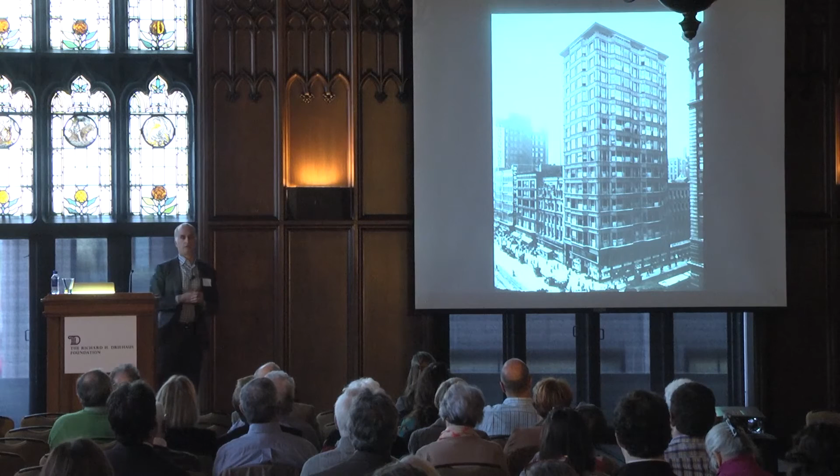So with items like this certainly being published and seen by architects all across Europe, but certainly in Germany, someone like Mies would certainly be aware of this, and in fact, inspired by it.

So in 1921, there was a competition for a high-rise in Berlin on Friedrichstrasse. This was the submission that Mies had made. And certainly as a student at IIT, spending five years in Crown Hall, you were aware of this—it was one of the few history lessons you learned at IIT. But this sort of glimmering tower had a new sense of what a tower could be and what the materials could be.

It is both reflective and transparent. It showed, in some ways, almost the dematerialization of a building into light, air, refraction, and reflection. It was really a very interesting image of what the future would hold.

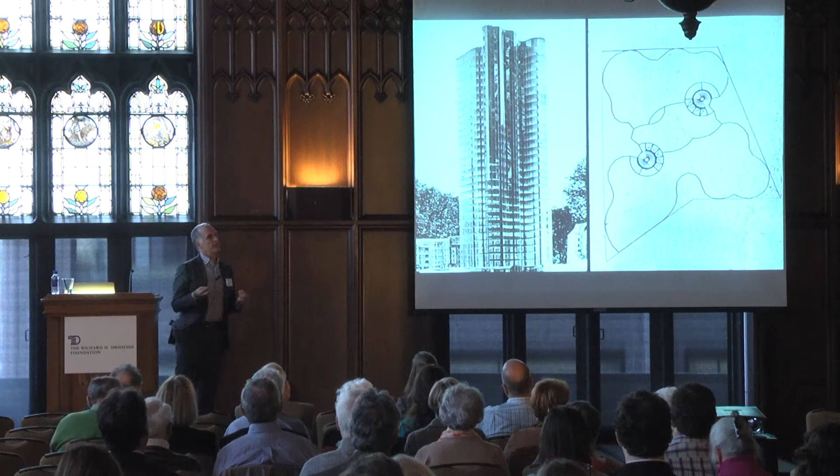The plan, maybe borrowed from Burnham with the Flatiron, shows a particular organizational sense. At the same time, Mies produced another image that we've seen again today, which is much more organic and free-form. But ultimately, what both of these images start to show is almost a complete lack of structure.

Moving forward to the end of the 1920s, we've seen it before, the Barcelona Pavilion, which again is an amazing building that appears on some level very simple and understandable when you stand in front of it and beside it, but as you go into it, it becomes more complex.

You can see the plan here. It's a series of travertine plaza with pools sort of at either end, and what appear to be some form of bearing walls sort of enclosing the whole space, although the center of the space is very free with floating walls. Again, I'm not an architectural historian, but what I find interesting is if I look at the center area...

That roof is indicated here in the blue, and if I take what could be bearing walls, I could support that roof very easily. So here in green, I've got what might have been the initial bearing walls, but then overlapping that is a series of 8 columns. So there's a bit of ambiguity that I think architectural historians have talked about a lot.

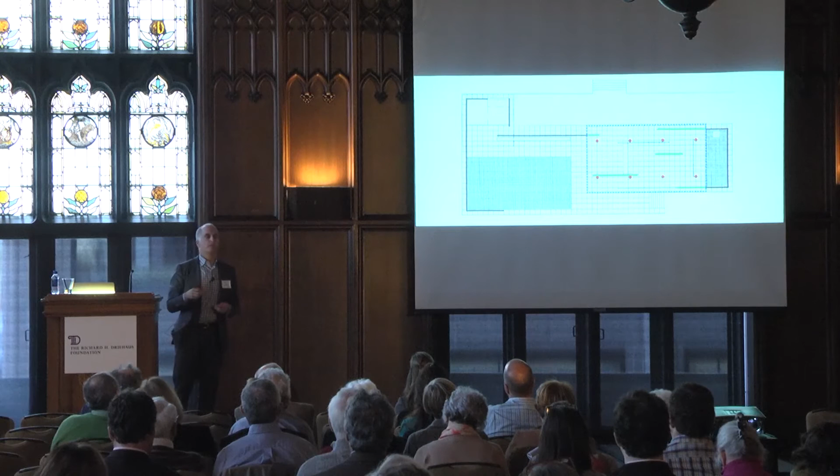What is the structural system here? Both are happening. And again, what I remind the audience is when you look forward to, let's say, the IBM building or certainly Crown Hall with the incredibly deterministic structure, here there's incredible ambiguity.

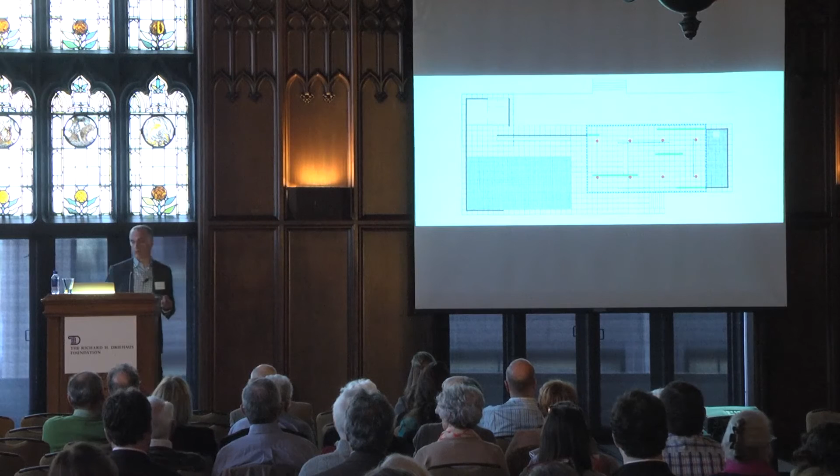I think that's what is lost in a lot of discussions about Mies and his adherence to structure. You can see that overlap of both wall and column. Is it free space, or is it space that is open because of the columns? It turns out, for the most part, the columns were the supporting structure.

If I jump forward very quickly to IIT, he's brought in as the dean, and his first building, which is the Mineral and Metals Research Building in 1942. You can see he goes from those free floating planes, both roof and wall, and it becomes a box. And we've heard before about the structural expression of that box.

This is not unique to Mies. This is actually unique to perhaps Chicago with warehouses. This is a routine way of actually doing structures for warehouses that Mies probably was aware of as he drove around the city. You can see here again sort of the open bay.

Here's where he starts to become interested in what's called the poetry of assembly. He's very interested in how things actually go together and the expression of the purest forms of the material that goes into a building.

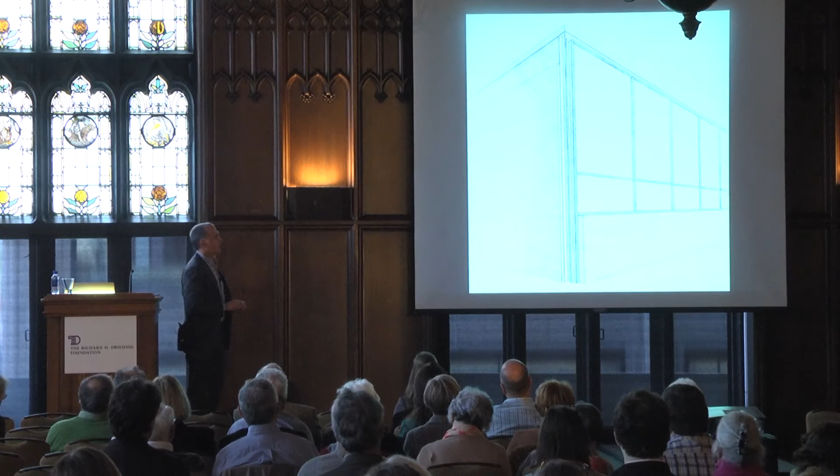An image or a study of a corner. As a student at IIT, you were certainly made aware of this condition. Here, the structure, the corner, how the structure actually turns the corner is actually a very difficult condition. Here, the steel turns and the brick is infilled. The brick is not bearing, and he expresses that non-bearing by exposing the corner of the brick, at least on this sketch. So he's trying to have clarity of construction, clarity of structure, and clarity of material.

Second building in about 1945, the Alumni Memorial building. Again, this starts to become more clear, his structural expression and infill.

And he wrote and said that the purpose for which a building is used are constantly changing, and we cannot afford to tear down the building each time. That is why we have revised Sullivan's formula, form follows function, and constructed a practical and economic space into which we will fit the function.

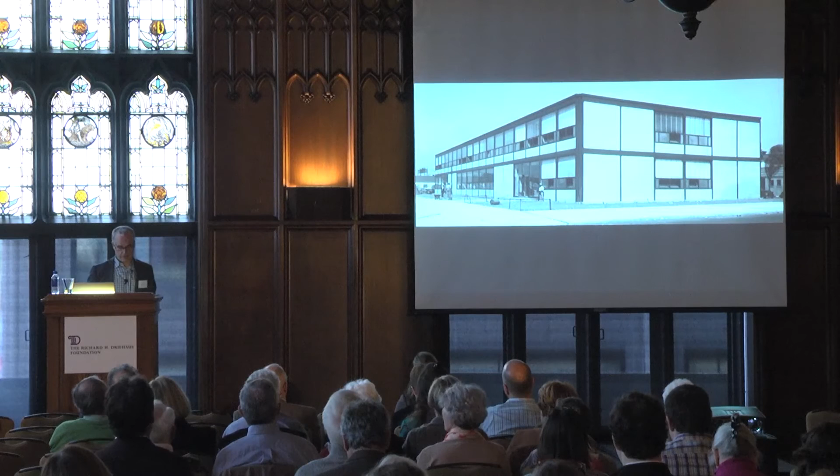This idea that Mies was trying to clarify his structural conditions certainly was a central aspect in his architecture at the time. Farnsworth House in about 1952.

There were other glass houses. This is not the first glass house in the history of the world. However, in some ways, he was stripping and minimizing even more the structure and the materials that he would use in his construction. Here, there's really four materials. There is certainly the steel structure, both for the terraces and the actual structure for the house. There's travertine on the platforms and terraces and floor.

There's plaster on the ceiling, and then there's glass as an enclosure.

He was reducing and minimizing the number of components that went into it, more and more as he proceeded. You can see here a plan - it's an open plan with a core, and it's not in the center. It's off-center, allowing the occupant to have different experiences as they trace around the perimeter of the house. There are private areas and public areas, and it's a beautiful construct of terrace and house all weaved into each other. It's white, as I've read, simply to be pure against the green and lush environment in which it was placed.

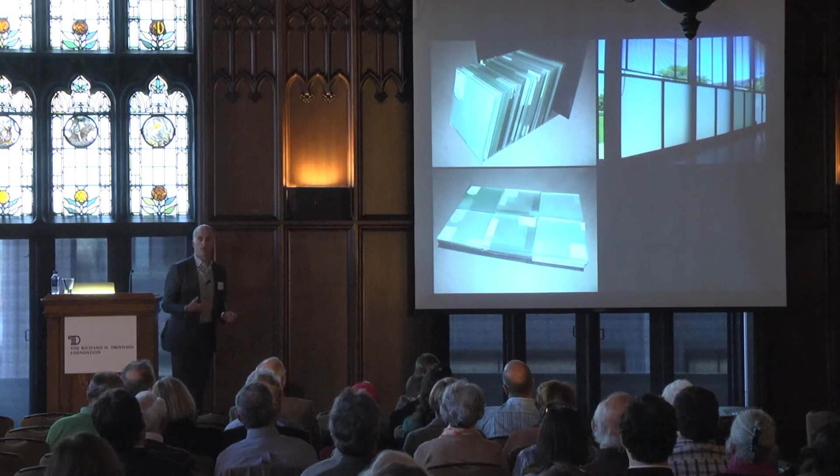So we went around campus to try to find examples, because all the glass had been taken out of Crown. We tried to find examples of how it actually was, what it looked like. We went through a fairly long and arduous process of looking at different glasses. In this case, you can see 6 samples actually brought to site and installed to understand how it would react.

The university, however, insisted that they would not live with this sort of glass ever again because they had a tremendous problem. It was basically a maintenance nightmare.

This is not a caricature of an architecture student. I actually think this is an architecture student that is unemployed and becomes a graffiti artist, because that's exactly how they use the space. They have no problem painting, gluing, and then the universal masking tape that sits on the glass for 4 months, getting baked in the sun every day, and then it tries to get removed.

So we had to prove to the university that we could do it. We got the benchmark sample, the clear glass, and we put all these things on the glass. We actually found a sort of 3-part epoxy to enable it to have resistance to all the student activities, and at the same time not change the character of it.

So we went through, you can see some of the installation here, but I want to talk specifically about one part of the building, and again, there's so little to the building other than girders, mullions, and glass. Here's a section of the building, the glass installed, those 13-foot-high pieces of glass on the top, and then the lower piece is about 8 feet by 5 feet. I want to focus on exactly the center part, which is about 8 feet high on the inside of the building. It's where the glass stops and the mullion of the two pieces come together.

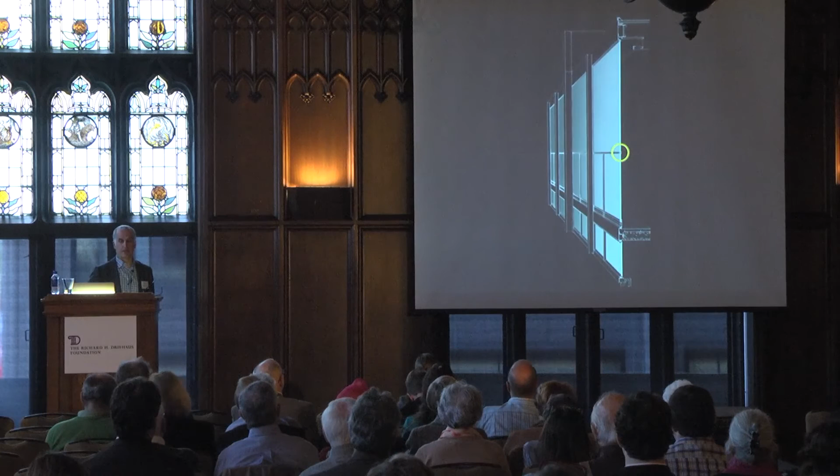If we look at it closely, this is the original stop detail. I know a lot of you aren't architects, but basically the glass is held in by 2 metal bars on either side and simply screwed in. This is a detail that Mies has probably spent thousands of hours developing. It was central, and it occurred both horizontally and vertically in Crown Hall. So it was really a detail that was the whole, and the whole was the detail. Back and forth it went.

The challenge was the upper light of glass, even though it had changed to a little bit thicker, needed to get even thicker still to comply with the new codes of the city of Chicago. When Mies did this, I have no doubt the university had no idea how experimental this building was, with its glass falling out and other things happening. So all of a sudden we had to increase that glass to ½ inch. We had to double it. The real challenge was, how do you double it and still keep the essence of a building that has so little to it? The requirement was what's called the bite, which is how much the glass actually sits in that channel.

Those pieces there are approximately, well, they're exactly 5/8 of an inch, and in this case, we had to go 3/4 of an inch. So it was a 1/8 inch problem. For you in the construction industry, 1/8 of an inch is never a problem, except here. It is a problem, and it's a very involved one, because how do you put what is a required glass that has a 3/4 inch bite into something like this?

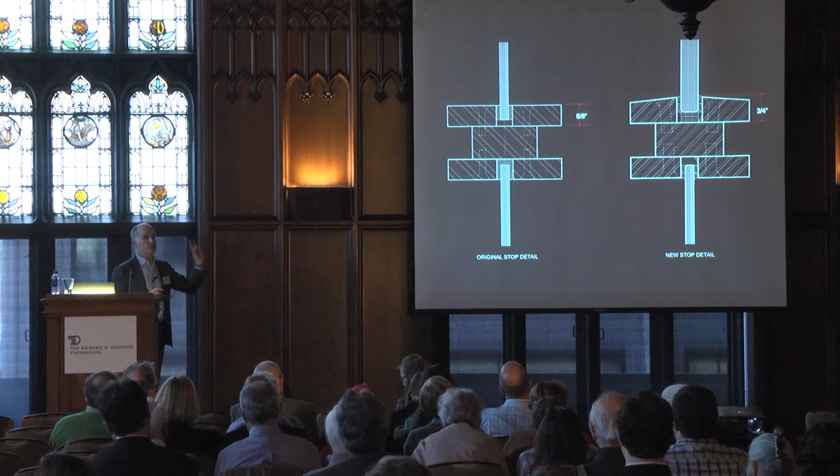At the same time, the stop screws again caused lots of problems, but ultimately, it was just that—you don't see it. We had to solve it, and that's where we believe design and historic restoration really have to marry. It's not simply following; it's finding the essence of what Mies might call the truth of the building and still holding on to that.

So in 2005, the entire building was draped because it had high lead content, so we had to blast the building down to nothing. It was actually quite good, because this is the first time in history OSHA standards actually helped the project—OSHA required blood tests before you got in, and some of the Mies police couldn't get the blood test, so they couldn't go in and review the construction. So when someone says OSHA is terrible, that's not always the case.

So we ended up blasting it. And this is the image that, for me, shows what I learned in the dismantling of it: the incredible delicacy of structure put in the building. That horizontal and vertical bar is so minimal, holding an enormous sheet of glass. That attention to just how thin it could be was really the essence and the learning piece. You can draw this forever until you see it, touch it, and almost hear it—you have no understanding of how delicate it is.

Into every life, a little rain will fall.

This is an example of what didn't work. Two weeks before the building opened, all the stops came in countersunk too deep. For a school I went to, a building I lived in for five years, where routinely we would talk about whether the slot of the screw should be vertical, horizontal, or 3/4 right or left, this was a travesty. It turns out we were able to work a little and ultimately open it up, bringing back the clarity of what the building is.

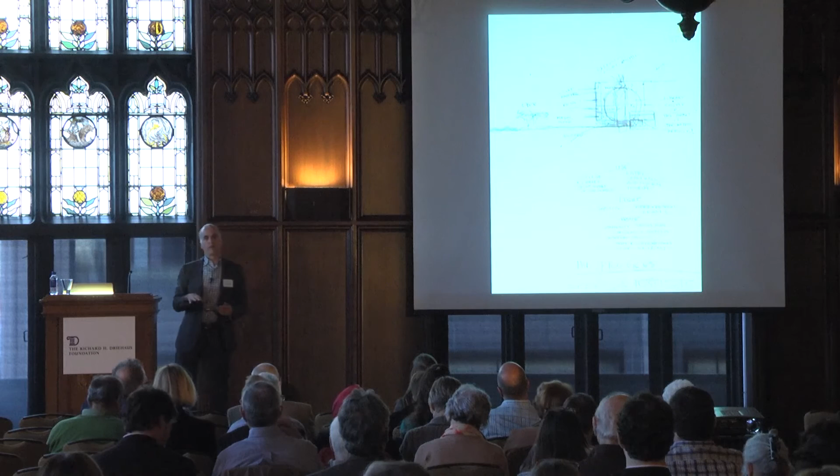It's a vertical building, on an 80-foot wide piece of property, and what we realized very early is that it had to work like Crown Hall, but vertically—connected as much as that central learning space in Crown Hall, but in a vertical sense. Since it had exactly one facade of four exposed, we started developing sketches, and this is a wonderful sketch by Ron of what it could be.

And the more we sketched and the more we looked at it, it was all arbitrary. It didn't matter. There was no connection. What was this? This was just pen lines on paper. It had no meaning other than just trying to come up with some idea.

So here, what we did is we looked back at where we were, context. Now, architects from IIT are not exactly known as contextual. That's not part of the ingredients. But here was a perfect place to look at context.

And what we looked at for that South Michigan Avenue street wall, when you hear the word wall, you think plumb and level. But you then look at it and you freeze the image, and it's anything but plumb and level. It's moving. It's almost vibrating, is what we found with these frozen images.

The Railway Exchange Building is, along with the Auditorium Theater, two supreme examples of how other great, we believe, incredibly progressive architects looked at the same problem we were looking at. Why can't we find from them answers to ours?

So we looked at a building like this, a great railway exchange. We looked at the bay, and we just analyzed it and said, what they were looking for, every one of those buildings was looking for the same thing: additional light, additional views, additional connections to what was and what is Grant Park and the lake.

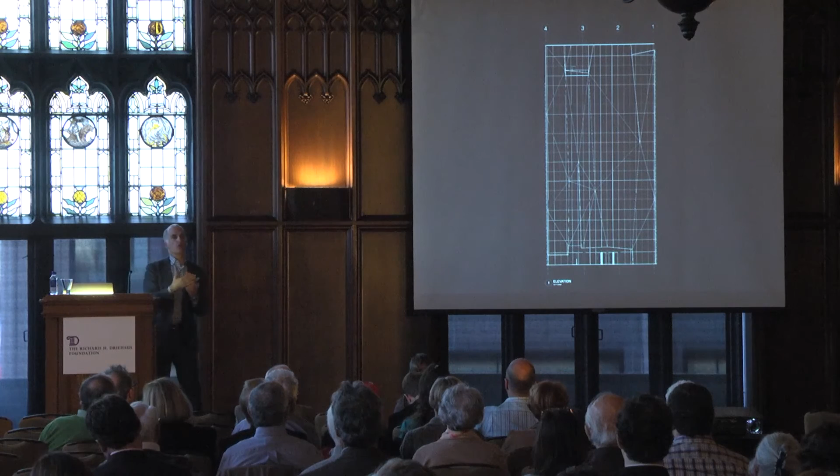Ultimately what we did is we took this folded series of lines and transposed onto that a grid. The grid was actually generated by what we started to see as the windows up and down Michigan Avenue—so the windows we were part of would become part of the building. This overlapping of the two, I believe, is where there's an integrity and a connection back to place and back to context.

So you can see that here, and then the components that go into it. We take it apart—we even show it in three dimensions—trying to figure out, okay, we've got its form, but how do we actually build this? Because of how we were trained, we had some confidence that we could actually figure it out.

So we continued with the form making, but ultimately we had to come down to the detail—what was the piece that actually made it work? All of us in our office are really determined to get to the essence of it, the same essence that Mies was looking for his entire career. We would look for it maybe this one time here. Certainly we would never compare ourselves to Mies, but we certainly had learned.

In this case, how do you hold the glass up? Well, this is a condition called a mullion—it basically supports the skin, because we really did want to have a skin of glass. But the problem was it had to be in two places at the same time, so as it starts moving up the building, this conundrum expresses itself.

We actually draw it—we said, how are we going to do this? What seems like, oh yes, we sat down for about an hour and a half and figured it out—well, it ended up being about four months of figuring out.

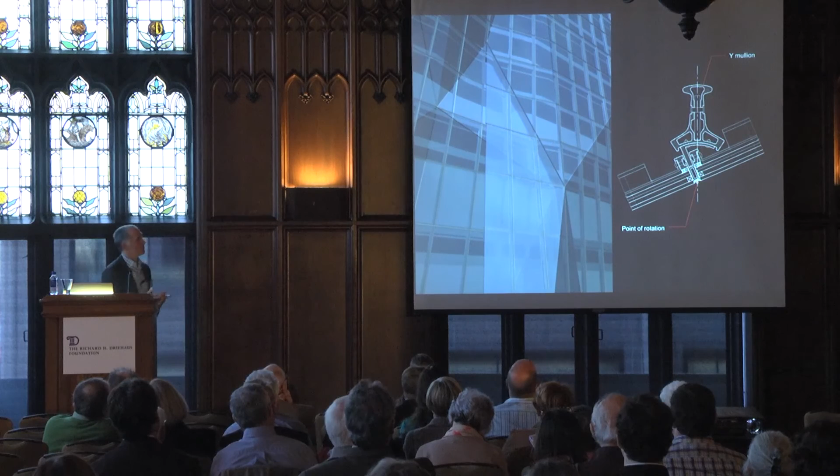We looked again at that particular skin, and we wanted to reduce the expression of the skin down to just its element of glass—that it's a surface, that surface folds, and as it folds it very freely goes across the facade. So we developed this notion of what we call a Y mullion, and you can see here we call it the point of rotation. It's one component that gets used everywhere.

In this case, even the process, which we love, the process of construction is just a beautiful art where skilled people are part of your orchestra as you're working. Here, men are dropping the skin into the frame that has been so expertly developed and controlled. The caulking is done by, again, another level of skill that we love.

So at the end of the day, we get this facade that we were hoping would be both part of the great Michigan Avenue street wall and also distinct from that, because it wasn't a building of commerce. It wasn't a club. It was a building of education. It was a building of open learning, and we wanted to really express that on the exterior.